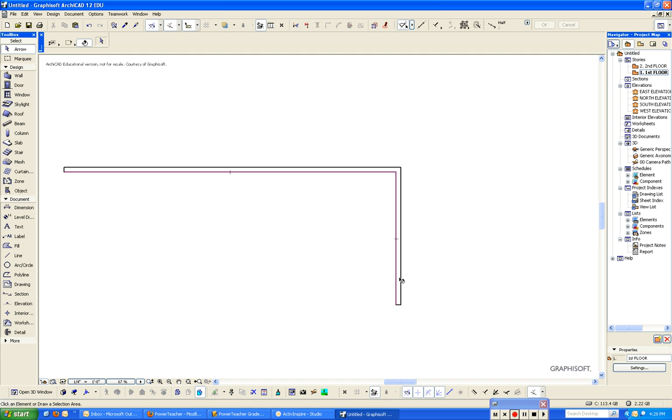How do we drag an object? Now that this wall is highlighted, it has two nodes, or what the program calls hotspots. If you select one, you get this little flyout box, and you can move this to be closer depending on where you want it. Right now it's on stretch.

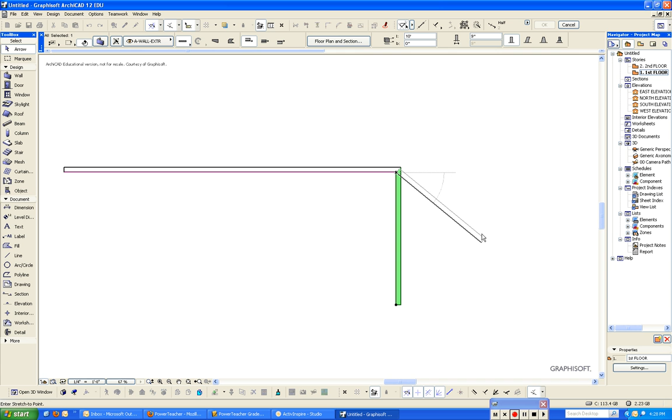We want to go to drag. Now that I'm on drag, I can move this anywhere on the screen. Same with this one. I'm on this wall, I can drag this anywhere on the screen. Same with the lines, I can drag these as well.

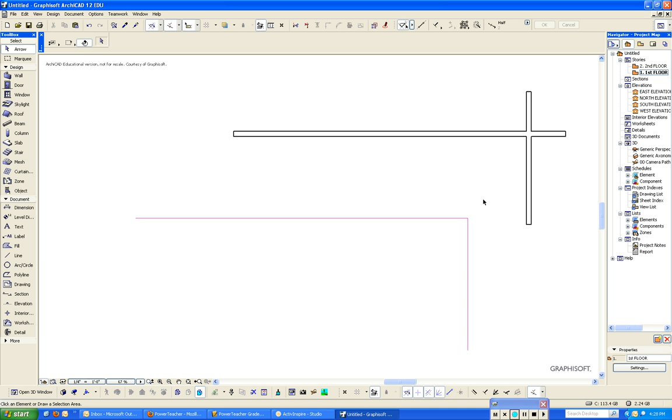The next feature is stretch. I want these walls to make a nice intersection, not hang over one another. By going to stretch, I can take this node and snap it to the wall. I'm going to take this node and drag it down. It snaps. If you look at this wall, I have a nice intersection.

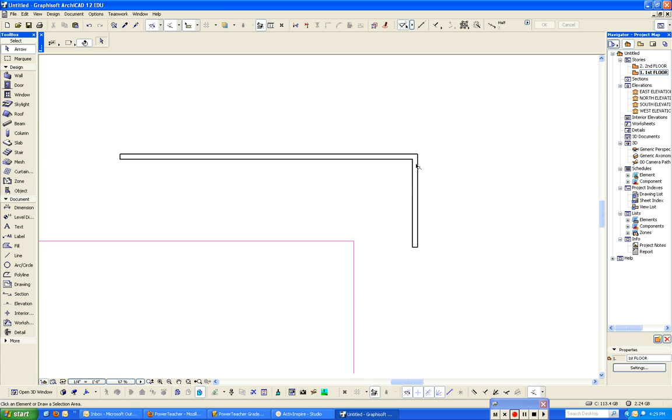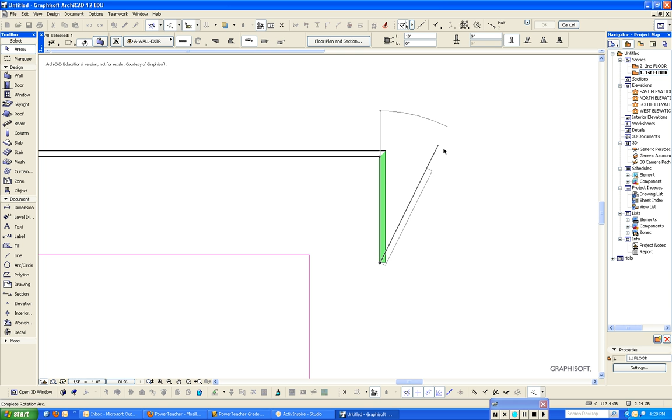What if I want to rotate an object or an entity? I can take this wall, again with that flyout menu, by selecting one of these nodes. You have the option here to rotate. I'm going to rotate this object by first clicking on one node, dragging horizontally or vertically. I'll go vertical, and then I can rotate based on that vertical orientation.

So in this case, I would want to have a wall to connect these two. I'll go up here to draw a wall. Now drag from one wall to the other.

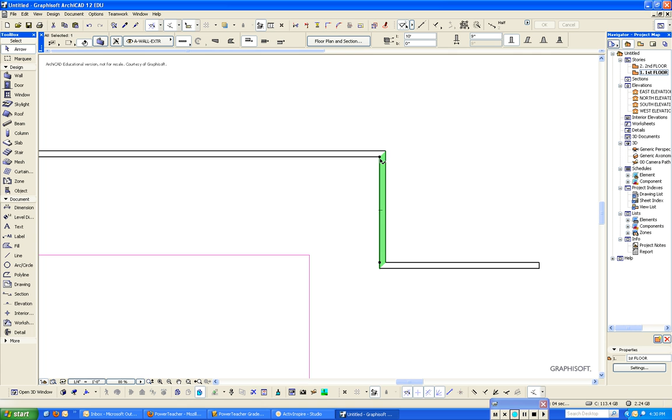If I want to make this wall longer, I can just select on it. I can hit stretch, and you'll see that my distance comes up. I want this wall to be 20 feet. I can override that dimension and make that 20 feet. If I know that I want this wall to be 20 feet as well, I can type in 20, and that wall length will change.

Here I want to drag this wall now. My flyout menu pops up. I want to drag that wall to that snap point. I've now set those distances of those walls, and I have clean intersections.

Some find just constructing the walls by themselves much easier than using construction lines. Whatever system works for you, use it.

One more thing: the wall thickness. Clicking on the wall, up here in your information box, everything is based on the wall because that's the object I'm selecting. It tells me how tall the wall is, the base height of the wall, and how thick the wall is. For exterior walls, having a 9-inch thickness isn't uncommon, but what if we were making interior walls?

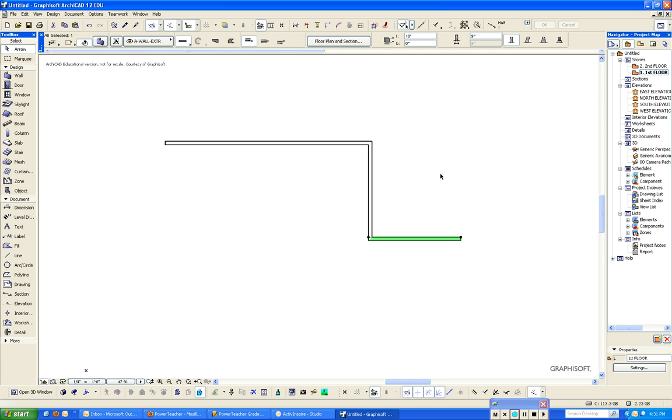Now let's go through that process. Just going to quickly finish off this area. Again, I'm going to stretch this wall in to make a nice intersection. Here's my exterior walls of my house.

Now I want to add some interior walls. I can do so just by setting my distance from my walls and putting them on. But your interior walls are very rarely 9 inches thick, especially in residential construction. So how do I change that?

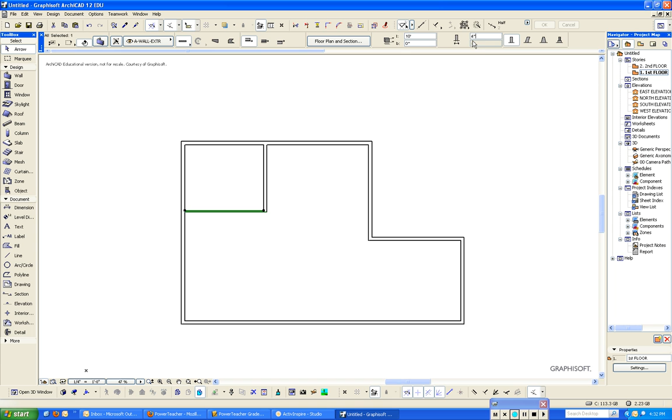All I have to do is select the wall, and I'm going to change that to 4 inches. Make sure you use the inch symbol. If you don't, it will be 4 feet. Once I select off of it, you'll see that this wall is now much thinner than the other wall.

I want to change this wall too. This is another interior wall. I'm going to make that 4 inches as well.

In order to avoid this from happening over and over, before you draw the wall, if you set this to 4 inches, because you know you're going to be drawing interior walls, now you can start drawing your walls, and all the walls that you construct until you change it again will be 4 inches wide.

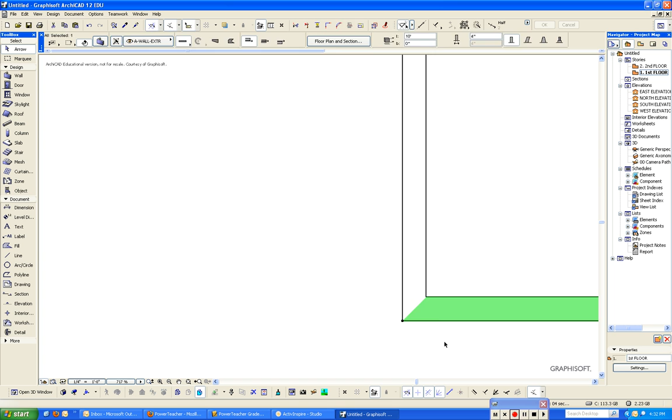Here's a case where we don't have a nice intersection. All I have to do is select this wall, and we can stretch that out to form that nice intersection.

If we want these walls to change, let's say we started with 9-inch walls to begin with, and you had some interior walls here that were 9 inches. But now knowing that you can change the size or thickness of the walls, and you want to change all these at one time...

This goes for any entity that you have: if you hold in Shift on your keyboard and select each of these entities, being that they're all walls, you can change them all at one time. I'm going to change the thickness to 4 inches, and all four walls here have changed to be 4 inches thick.

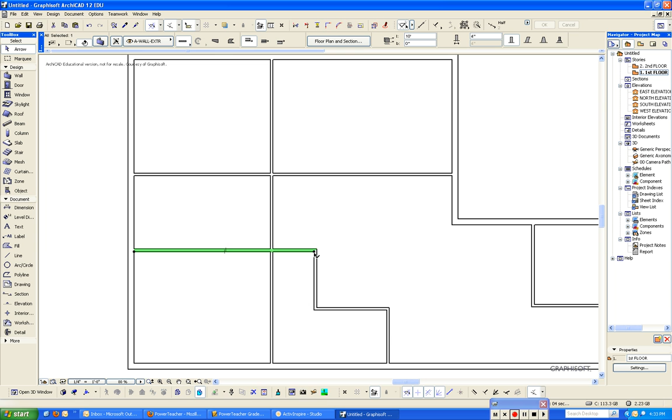Can I still stretch and drag these walls? Yes, I can. I can stretch this wall all the way across. I can drag this wall down, and I'll essentially change the layout of the rooms in my house just by dragging and stretching.

This is how you edit walls using ArchiCAD.